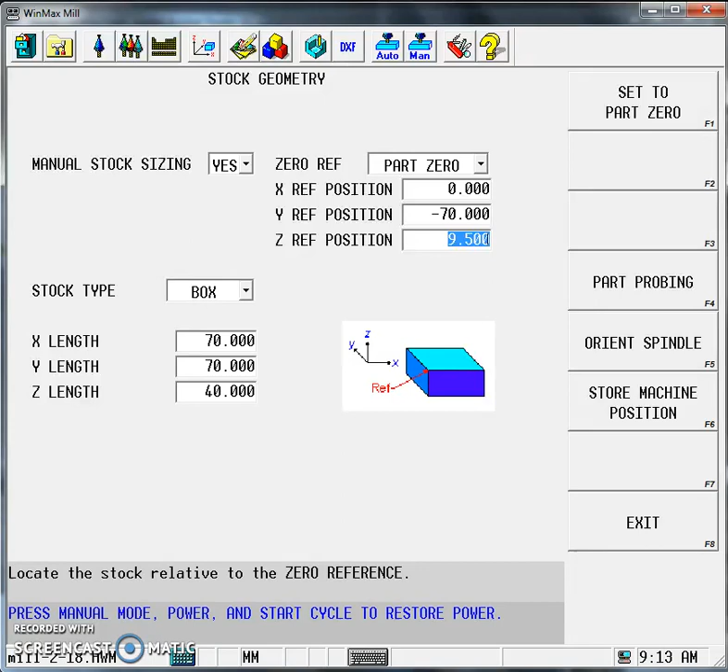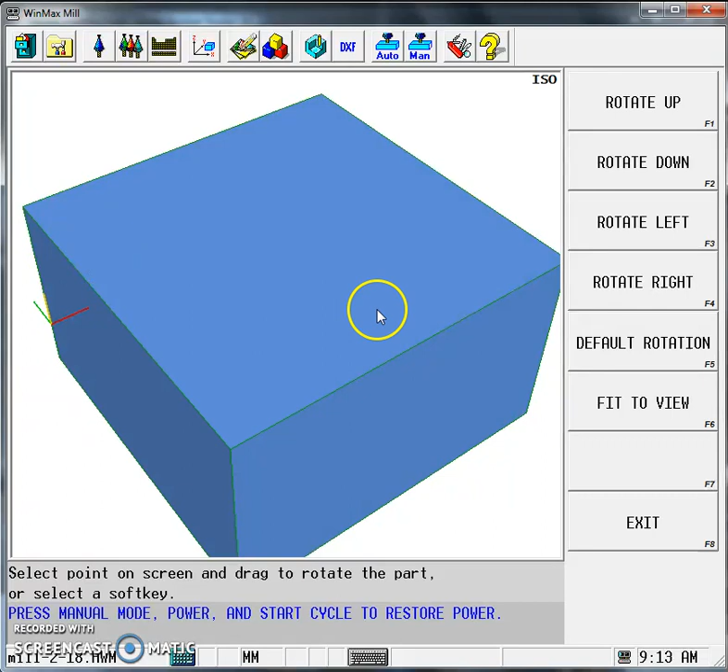So if we do a quick draw to check the shape that we have, we can see the block of material, and if we rotate it, we can see the origin on the back corner 10 millimeters up, which is our corner of our vise. So the first thing we're going to do is machine the top face. So we can go back to our input screen, part programming, milling, and face.

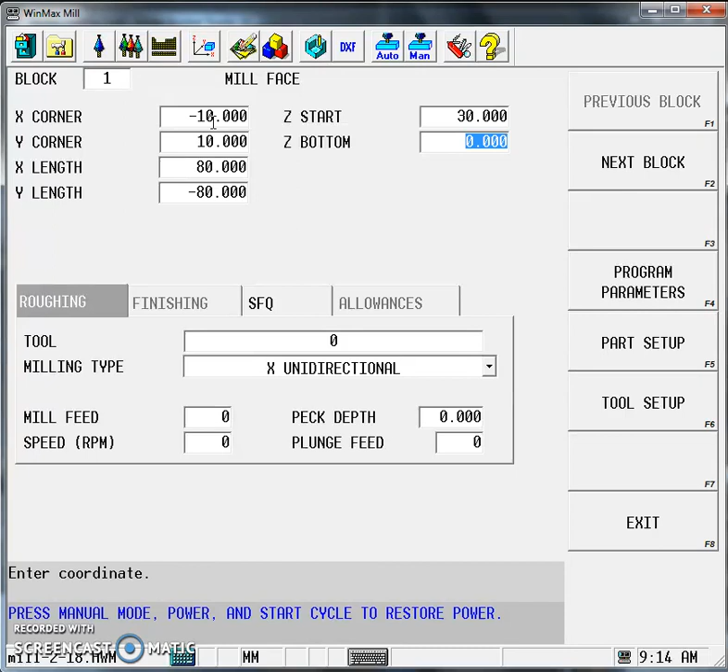So the X corner can be minus 10. The Y corner can be plus 10. Okay, and then we're going to machine a length of 80 in the X and minus 80 in the Y. Our Z start's going to be 30, and let's go down to 28. This type of tool then is going to be a face milling tool, so we can select tool from list and face mill diameter 80, select tool.

And we'll go in X unidirectional, we're going to go X bidirectional, or it could be Y bidirectional. Our speed and feed, you need to work them out on the calculations that we showed in class, and we'll go for 1 millimeter peck depth and plunge speed of 100. So that's our first operation.

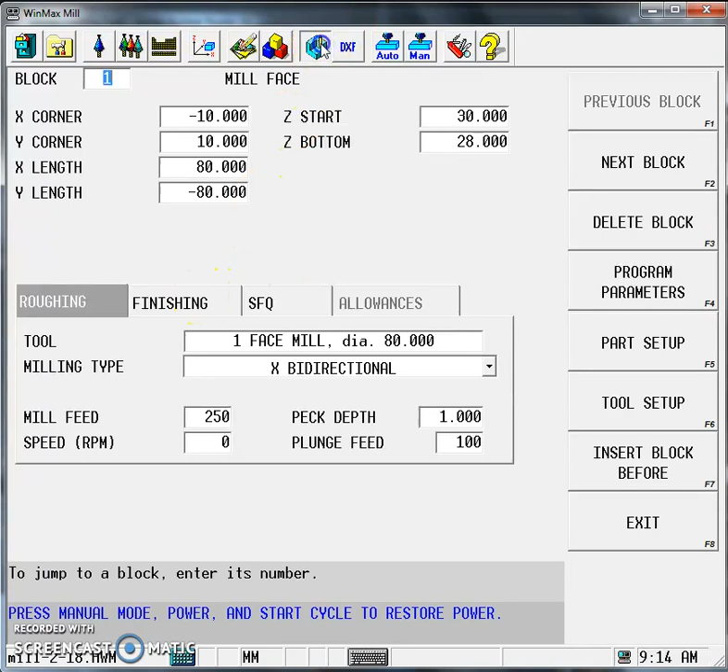So we do a quick draw to check that out, that we've machined the part correctly. I'm just going to zoom right out here and see what's happening. Alright, the cutter's 80 millimeters diameter, that's why it starts so far out. That's fine. We can go to end of program, and we'll go to insert block before.

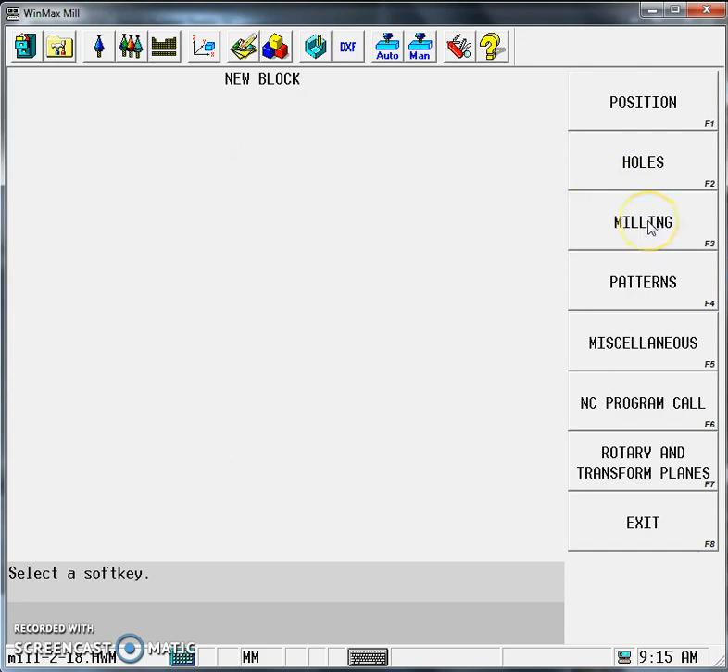So what we do here is we do a milling operation. And what we can do here, we can do a frame. Alright, and our X corner, Y corner, again we're going to start them just outside the part. So we can actually have that at minus 5 and Y is 5. So we're outside of the part. And again we need to go the length of the part, and the length of the part was 70. And we're adding on 70 and 5 and 5. So it's going to be 80 long, minus 80 in the Y.

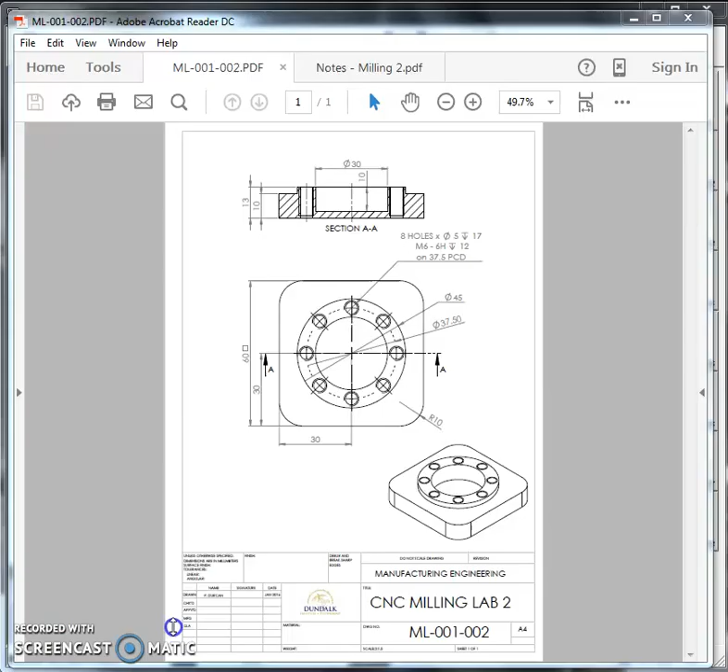The Z start now could be 28, I think we were at. And our Z bottom needs to be the height of the component that we want to leave. So if we look at the drawing here, that's a 3 millimeter drop here on the top of the part. So it's this 10 less 13. So that's 25 we're going down to. And no corner radiuses. And the tool here we're going to pick is a small end mill. So we're going to pick a diameter of maybe 10 or 12 end mill and select tool.

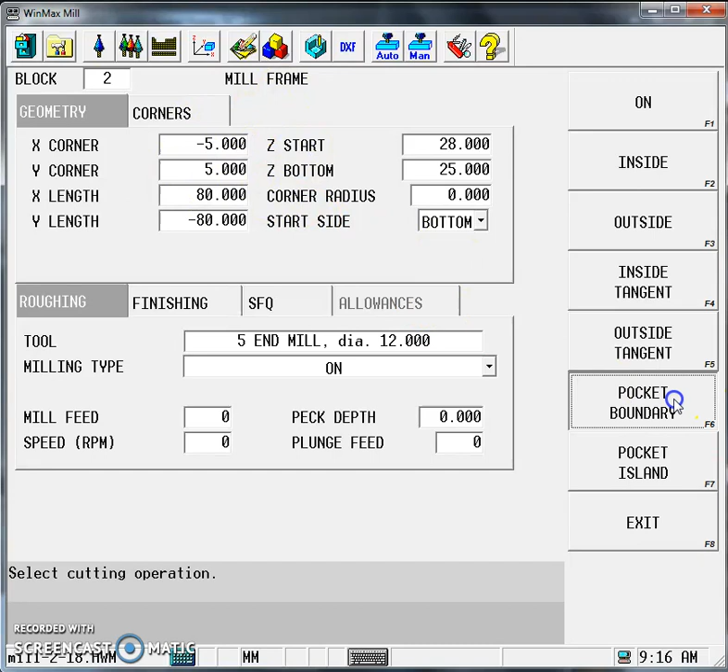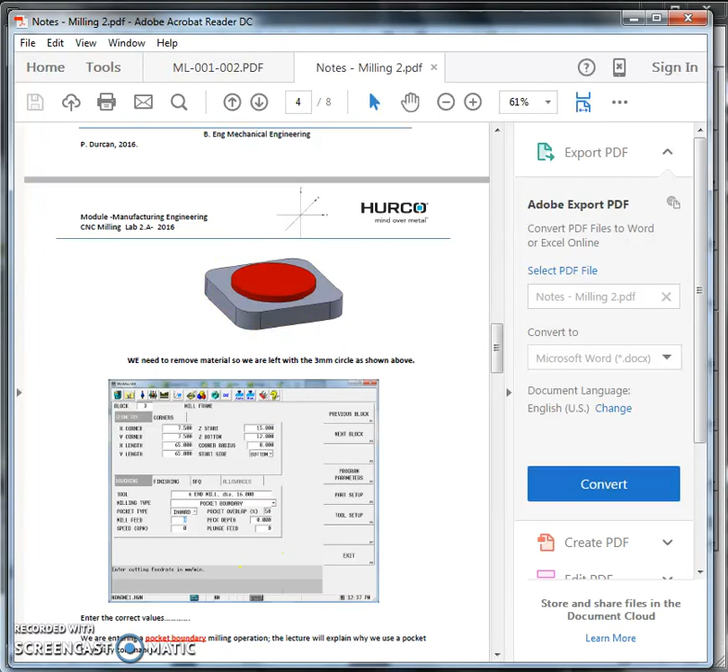So if I go back here to my program, and I can go to my data blocks, and I'm going to insert block before, and this is going to be a milling operation, and it's going to be a circle. And I need to define the center of the circle, so I'm working off a 5 millimeter offset in the part, I think it was. So my center is actually going to be 35 minus 35, and my radius of my circle is going to be

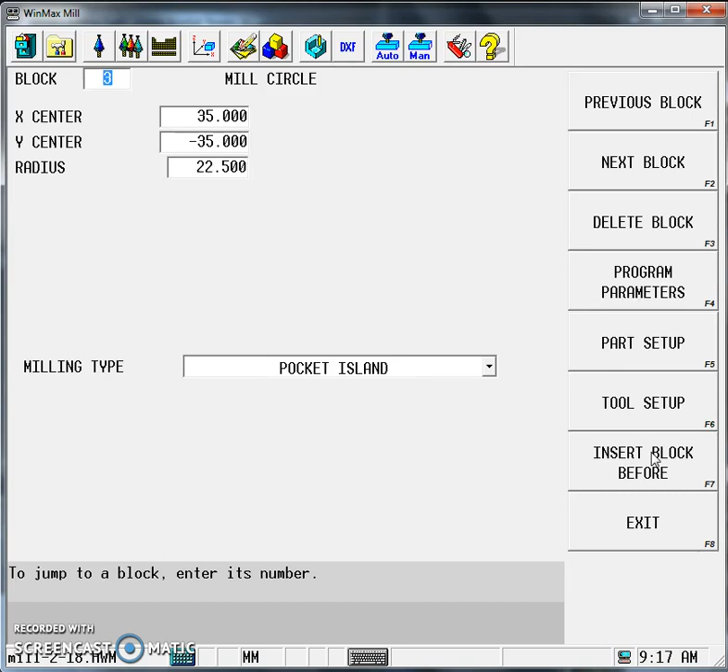22.5, I believe. And straight away, before I fill anything out, the milling type, I can change it to a thing called a pocket island. And that's all the data I need to do. Now when I draw the part, it should leave an island in the middle, being the circle.

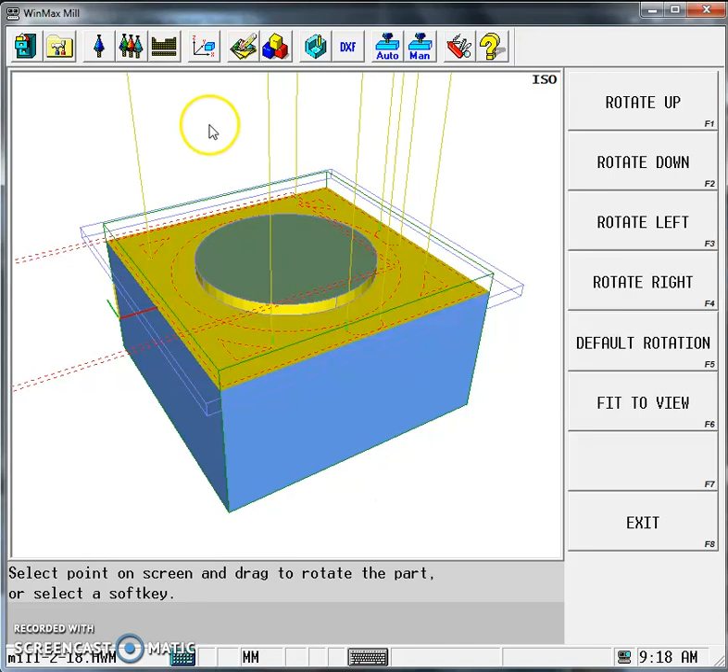So we can see the island being left, the boundary we cut outside here which is the blue box, and then the circle is the island left in the middle. Make sure we go back to our input screen and save our part there, MilLab 2, and we can continue on from that and do similar.

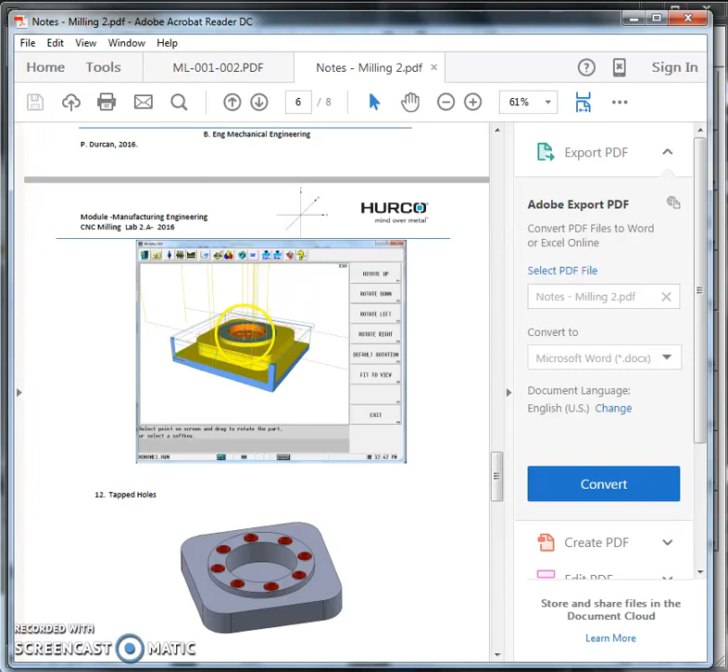Just look at the notes a second. The next step we look at here is to create the circle in the center, that orange circle, which again is a milling operation, and we'll do that now. So at the end of the program, in data blocks, end of program, insert block before, milling, circle. Again we use the exact same x and y coordinate.

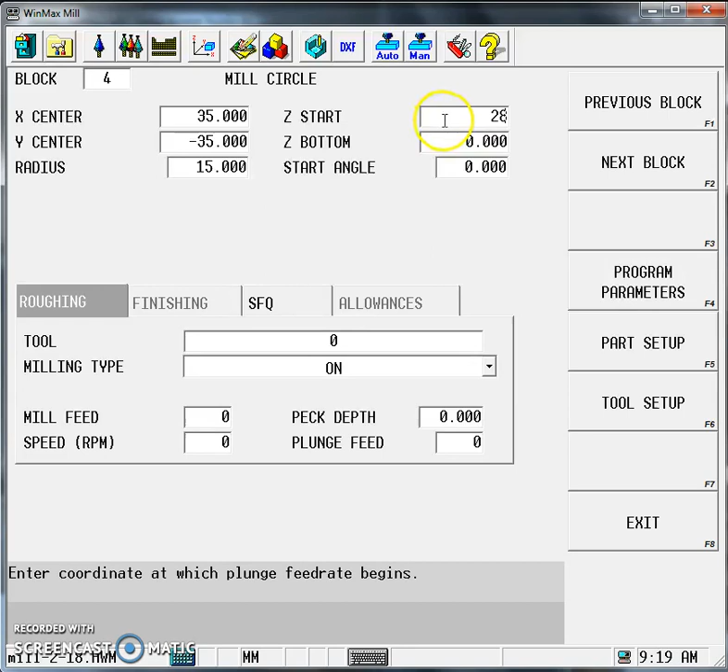That should be 35 minus 35, and the radius here is 15. Our Z start should be the top of the part, which was 28, and we're 10 deep, so we're at 18. Start angle we leave at 0. The tool, we're going to pick a diameter 10 end mill, and it's going to be a pocket boundary, so it's everything inside the pocket and it's inward.

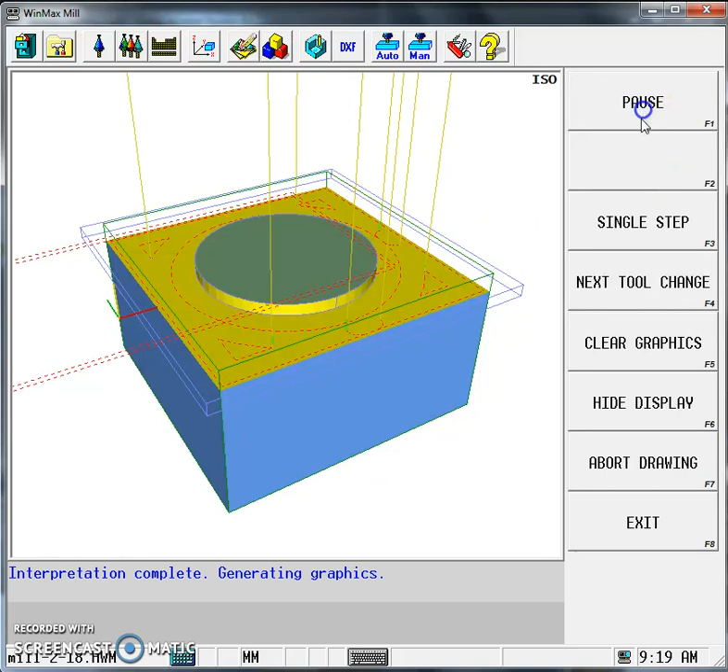Now we enter the correct feed and speed that you should work out from your calculation. We do a draw, draw, draw. And that's the top of the block completed.

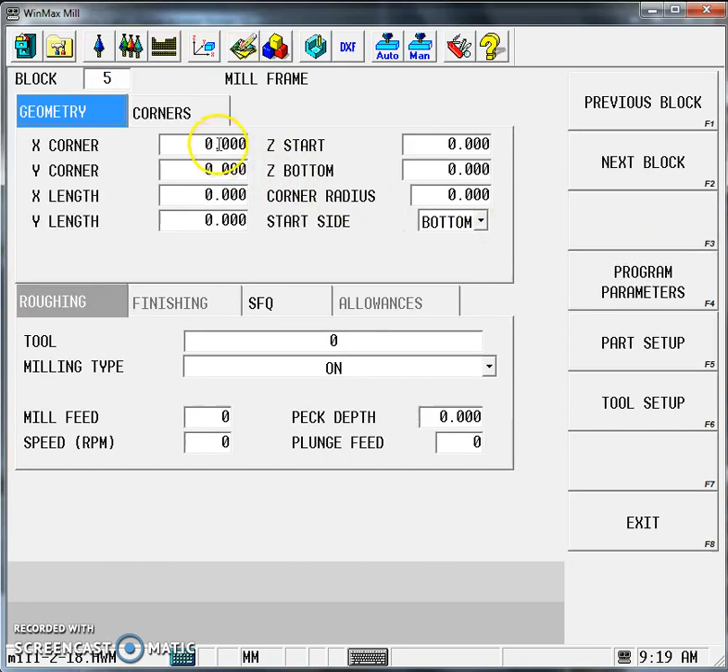Now we could add to this component, we need to do the frame around the outside maybe and the tapped holes. So we'll go back to the data blocks, insert a block before, milling, frame. The frame is going to be our component. We're in 5 and down 5, and the length of our part is 60 and minus 60.

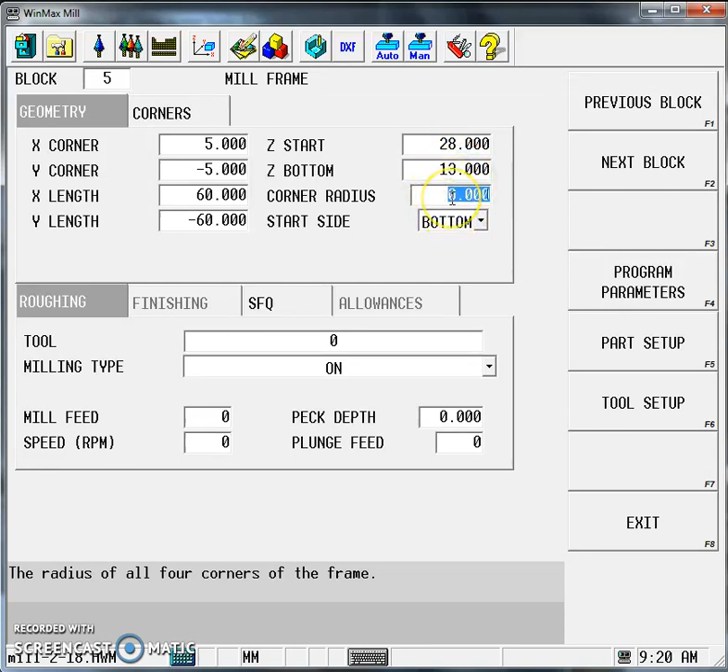We can start at 28, and we need to go down to the bottom of the part, which is going to be around the minus 15 mark there, so even 28 down to 13 should be fine. Corner radius we can set there at 10 as per the drawing, and the tooling is select tool from list.

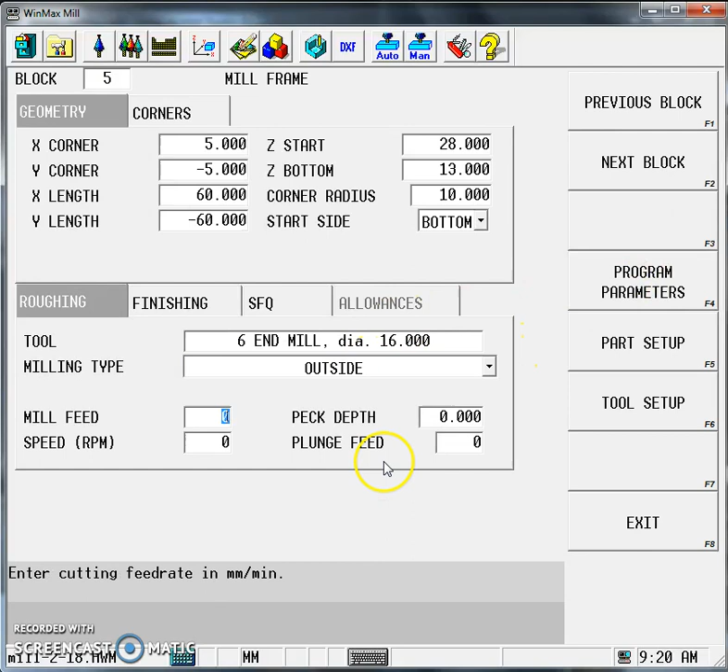It's going to be just a large end mill, maybe a 16, and it's outside. Again you can fill in the feeds and speeds on your worksheet. If we do a quick draw on that, we should see our island, our pocket, our frame on the outside, and I hit rotate there. I'm getting the different colors because I'm using different tools for the different blocks.

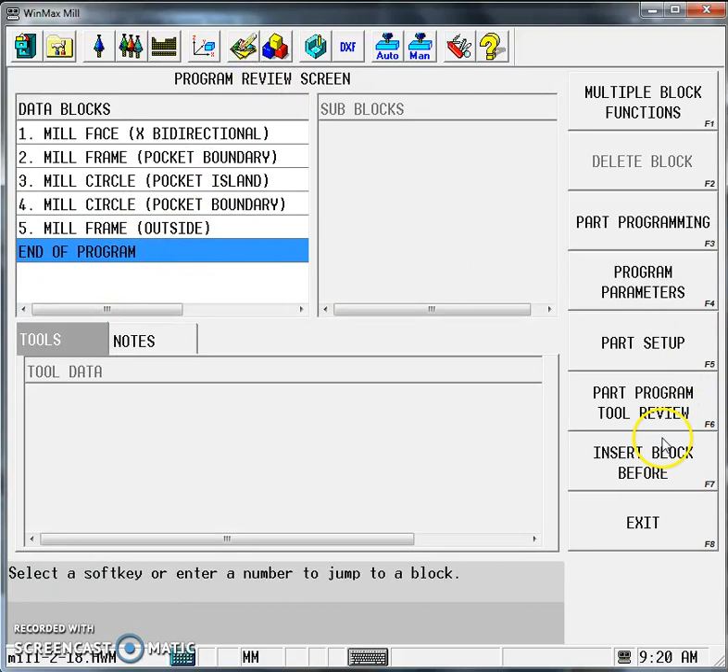The final block we want to look at, insert block before, holes, and we can just do a drilling operation here. Should be okay, and we're going to do a drill. Our Z start is going to be 28, and our Z bottom, we're going to go the whole way through, so let's go down to 10 on the part.

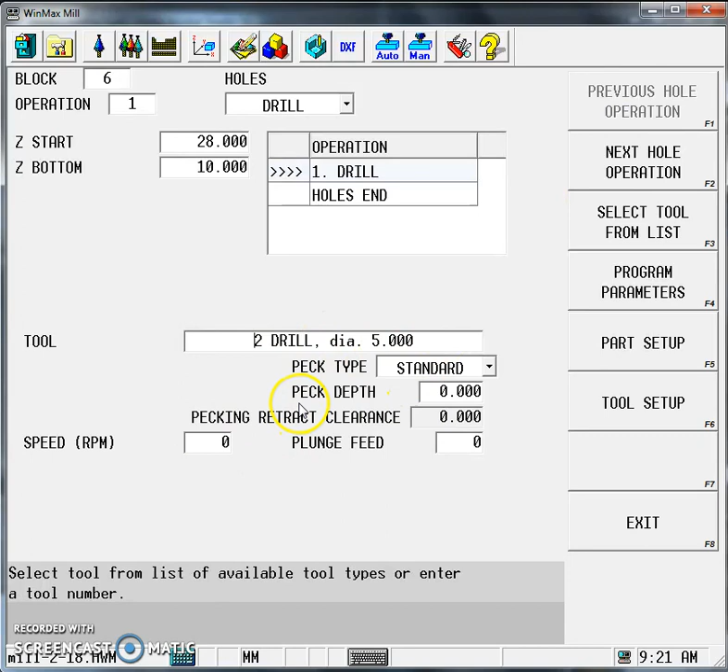The tool we're going to pick here, select tool from list, is a drill diameter 5, because we're going to tap it M6, and again you can work out your feed and speed. Our next hole operation, straight after our drill, is a tapping operation, and it's a rigid tap as we refer to it.

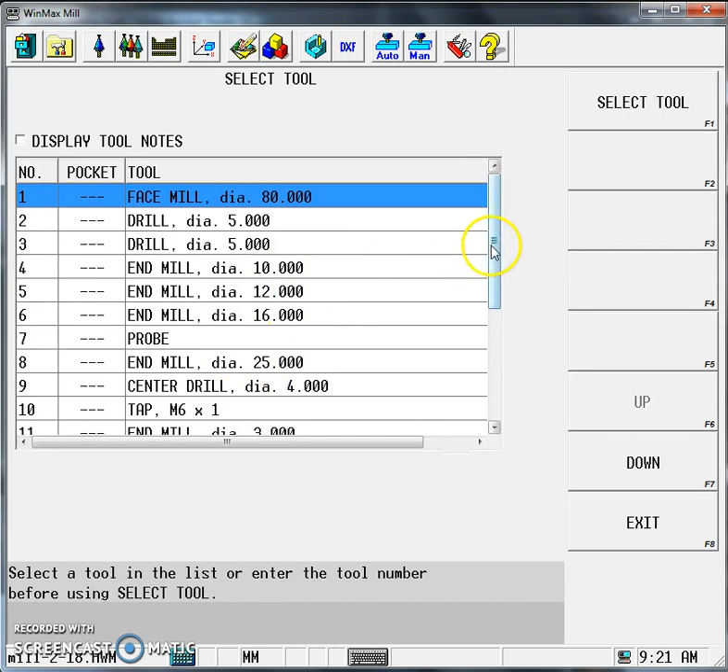Again we can start at 28, and this time we're just going to go to 10. The tool that we use here, select tool from list, is going to be an M6 tap, M6 by 1. Again we can look at those speed and operation. We leave 0 as the peck depth because we use a machine tap, going the whole way through.

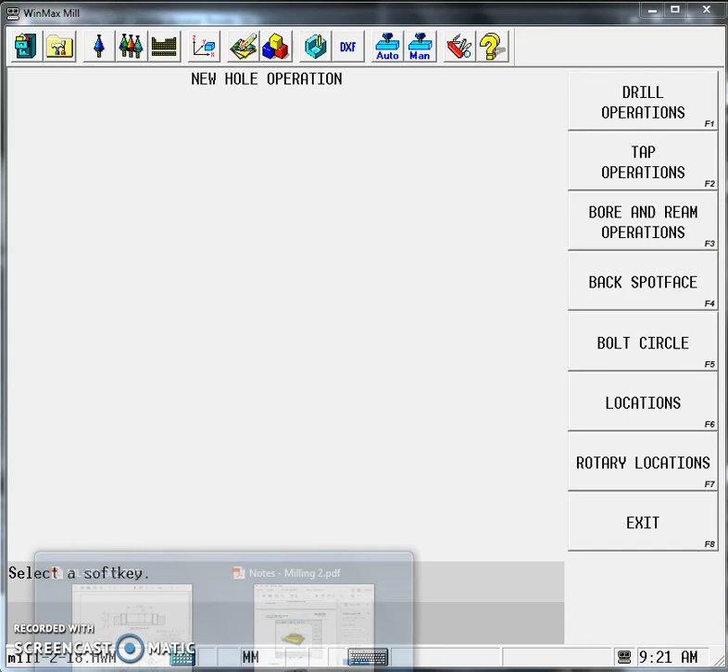Now we've only defined the Z coordinates, so we need to find the X and Y coordinates of the hole. So we can do next hole operation, and the fact that we're doing a circle, a bolt circle here as such, we can see it's on a diameter 37.5. If we go back to the program, we can do this bolt circle here, and number of holes we can pick is 8 holes.

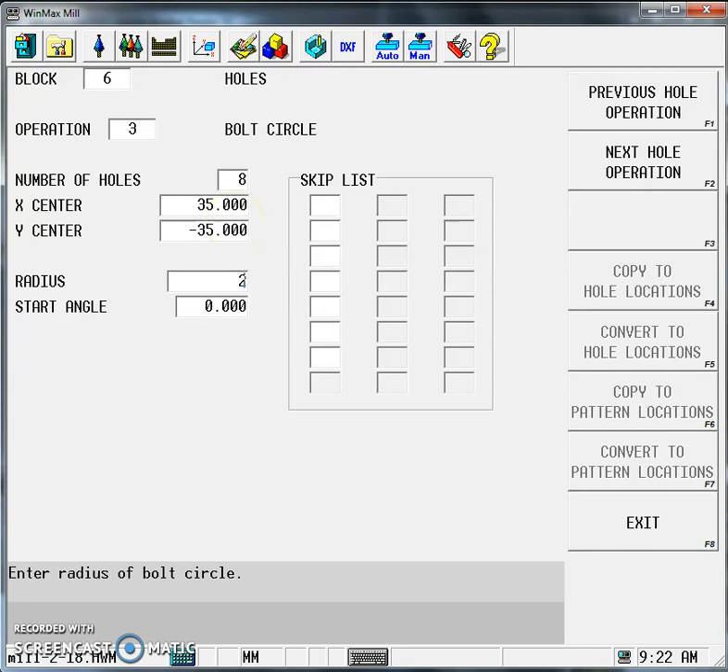X center is 35, Y center is minus 35, radius was 37.5 divided by 2, and start angle we can leave at 0. We can actually skip instances here if we want to, but we don't want to skip any. We'll do a quick draw there to check that, and there's the drilling of the holes and then the tapping of the holes.

And that's the component completed there for this model.